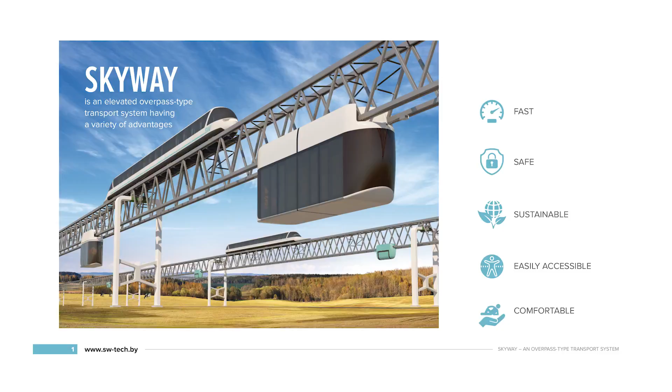Now I want to show you a small video, so you will see everything with your own eyes. I want to attract your attention to the fact that everything which will be shown is not computer graphics, but it's a real video which is operating in our Ecotechnopark in Belarus.

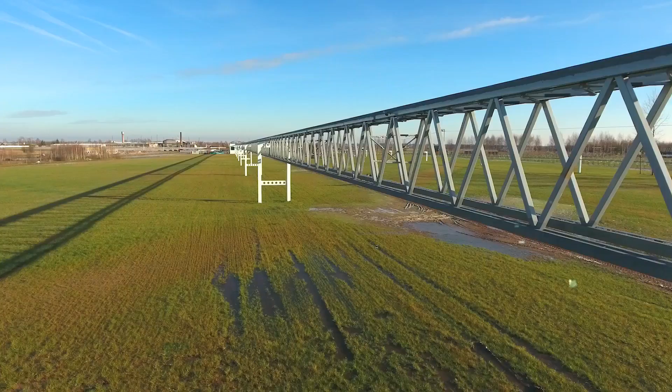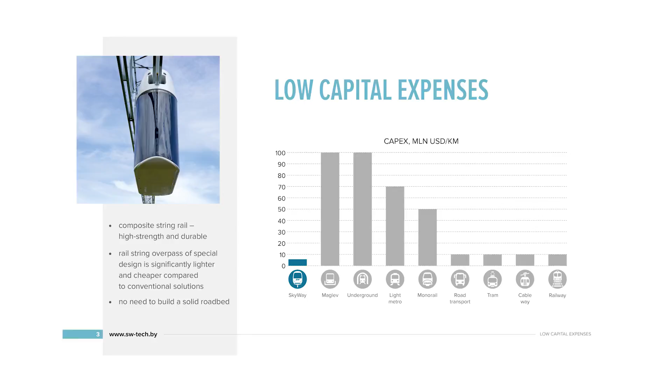Now I want to speak a bit more about the advantages of our transport system as it differs from conventional transport. First of all, we have quite low capex. You may see at this graph that our capex is at least twice less compared with most conventional transport, and if we compare with monorail, metro, and maglev, it could be 10 times less.

The main idea is that we use a very light but very rigid string rail, which is based on pre-stressed strings put into concrete. That's why we get a light but very solid structure. It consumes less material, that's why it's cheaper.

Further on, we have minimal operating expenses. If we compare with conventional transport, we can see that the most part of OPEX is labor expenses and cost of fuel. In our case, it's the least part. Our transport is driverless, so we use an automatic control system - I will speak about that a bit later. In general, our transport system is 2 to 5 times cheaper in terms of OpEx compared with conventional transport.

The next point is our transport system is ecologically sustainable. We use minimal land resources, and we use electricity, which minimizes harmful emissions to the atmosphere, and lots of people like that.

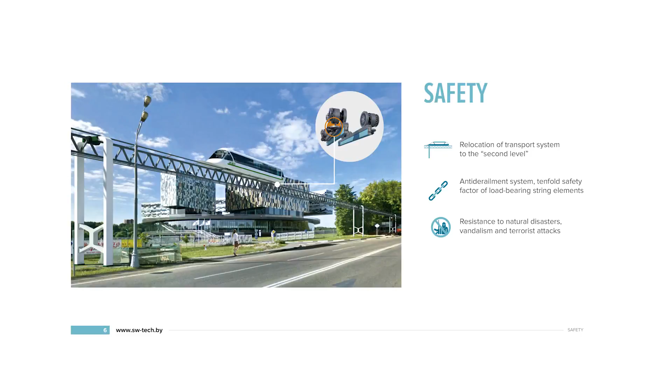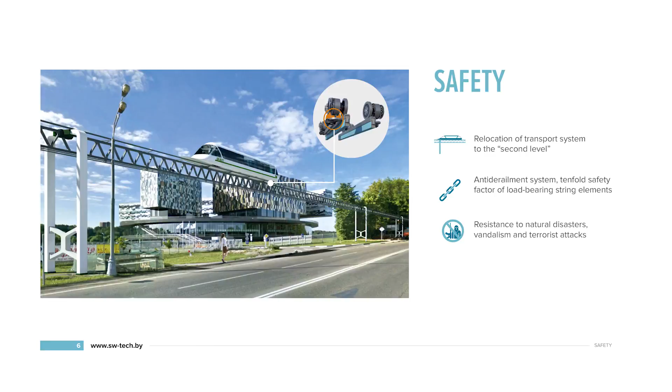The last point is safety. The main issue is that our transport system is situated at the second level, so it doesn't cross with existing transport at all, so traffic accidents are minimal. The second point is the anti-derailment system, which you can see in the picture - it also increases the safety of our transport system. And it's resistant to natural disasters. The previous speaker was talking about floods here - actually it's also resistant towards earthquakes, tsunamis, and other natural disasters, so this transport system won't be ruined if any natural disasters happen.

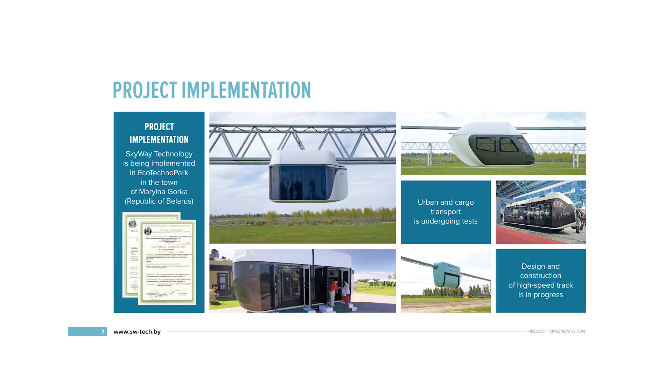Actually, now we are implementing that at our test site in Belarus. We call it Ecotechnopark, situated in the town of Maryina Gorka, not far from the capital city of Minsk. Here you can see all the main types of our transport: Unibus, Unibike, Unicar - I'll speak about them a bit later.

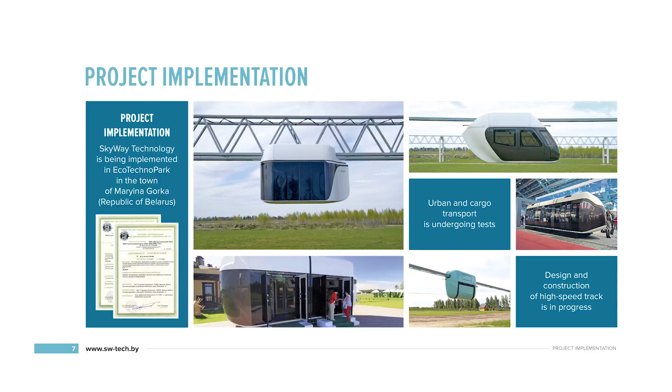At the end of the previous year, 2017, we got certificates from the Russian Institute of Urban Transport, so these vehicles are not just operating, but they are certified.

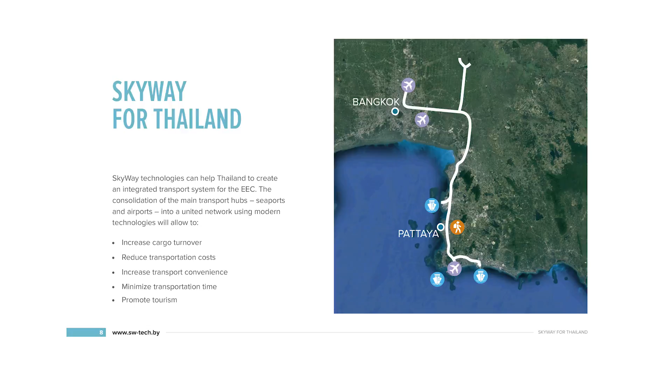Now let's think about how our technology can help the development of Thailand, in particular for the Eastern Economic Corridor. You can see this map - the main point here is to connect the seaports and airports into one integrated transport system. What we can do here: first of all, increase cargo turnover, reduce transportation costs, increase the convenience of the transport, minimize transportation time because the speed of our transportation is up to 500 kilometers per hour, and promote tourism as well.

Now let's speak about our main solutions which could be applied here. First of all, it's cargo transportation. Speaking about the SkyWay transport system, it has several advantages: it's autonomous, it's point-to-point, it's high speed, it's ultra-safe, and energy efficient.

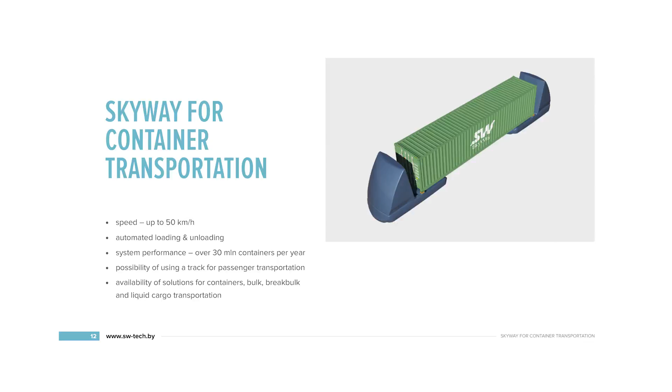Here you can see how our container transportation could work. The speed is up to about 50 kilometers per hour. It's automated loading and unloading, and its performance could be over 30 million containers per year. We can also use the track for passenger transportation, and we have different solutions not only for containers but also for bulk, break bulk, and liquid cargo.

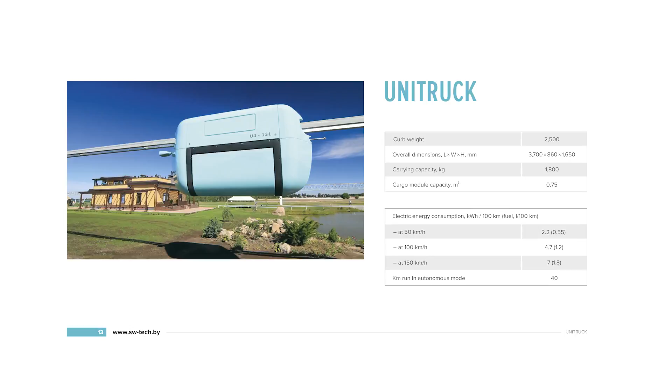This is our cargo module, which is called Unitruck. It's arranged for a small amount of cargo, for bulk cargo, actually 1.8 metric tons. But if we place them one by one, it can carry quite a great amount of cargo — we consider the performance of such a system about 100 million tons per year, even despite it looking so small. It's already operating at our EcoTechnoPark, so you may see it in the video.

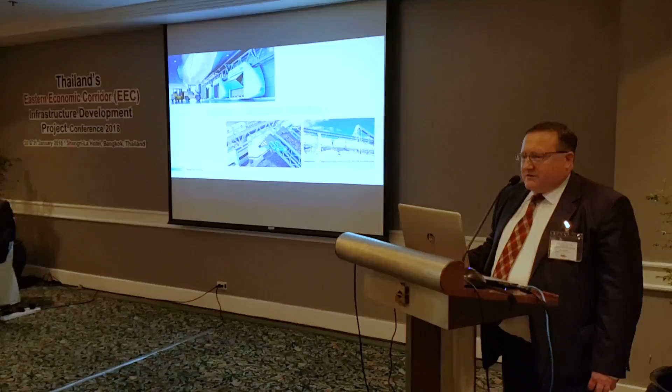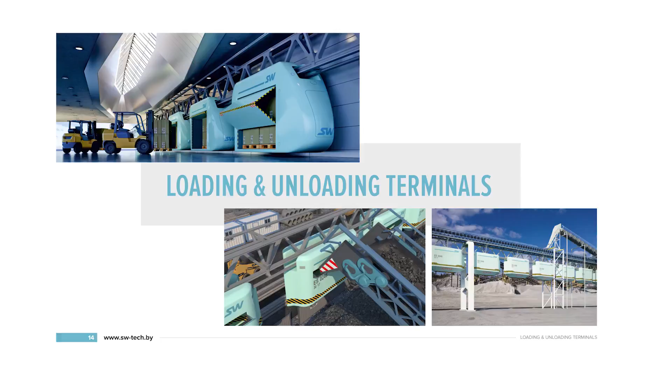We also have solutions for loading and unloading terminals, and I think that all these cargo systems could be integrated, combining airports and seaports into a unified transport system.

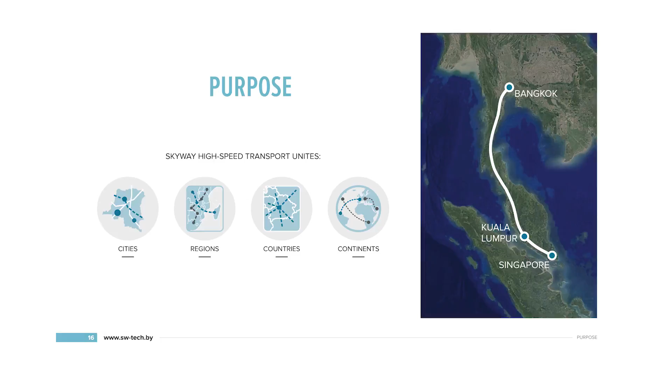Well, the next solution which I want to speak about is high-speed passenger transport. As I told already, it is up to 500 kilometers per hour. It's bigger compared with conventional high-speed trains, and it can be used to unite cities, regions, countries, and even continents.

Here on the map I give a possible example of how it could be applied for the case of Bangkok. For example, we can connect Bangkok with Kuala Lumpur and Singapore, and yesterday we were discussing the project Kuala Lumpur-Singapore. I think this solution could be also applied for this project.

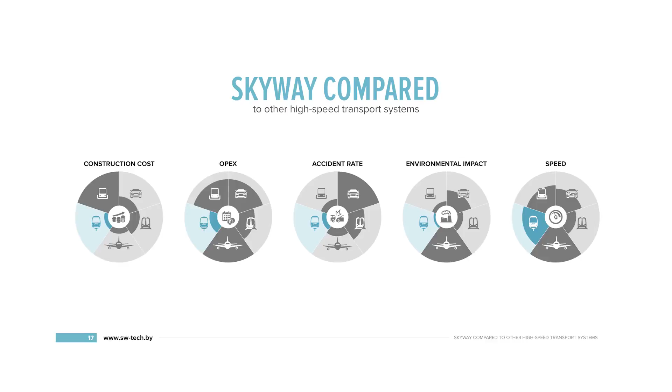If we compare SkyWay with other types of high-speed transport systems, you can see that in almost all the parameters — construction cost, OPEX, accident rate, and environmental impact — we are better. Maybe the only point where we look a bit worse compared with aviation is speed, but we should take into account one point: if you go to the airport, you anyway need to wait for boarding, stand in queues, pass control, and actually you have to add 3-4 hours to the time of your trip.

In our case, we get from the city center or city suburb exactly to the city center or city suburb, and actually, for example, if you go for 500 kilometers or 1000 kilometers, you will get to the place of destination faster.

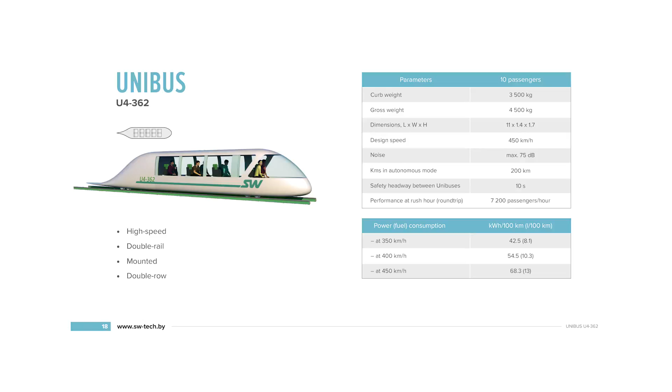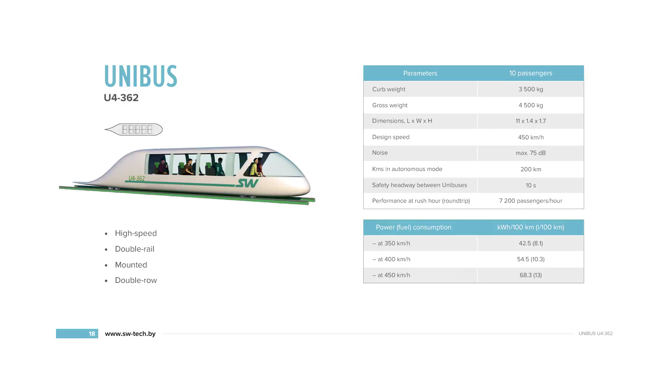And these are the technical parameters for our high-speed unibus. It's designed for 10 people. Its design speed is 450 kilometers per hour, and its performance is about 7,200 passengers per hour.

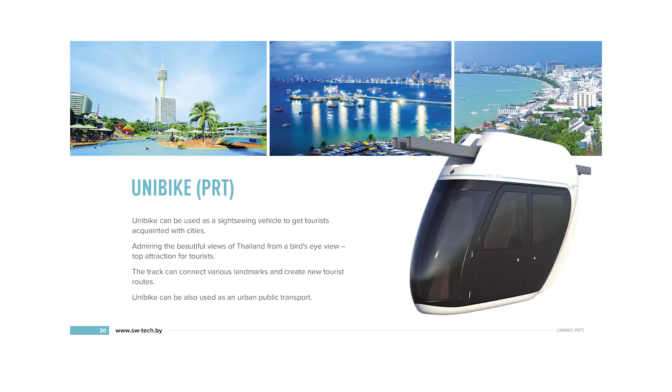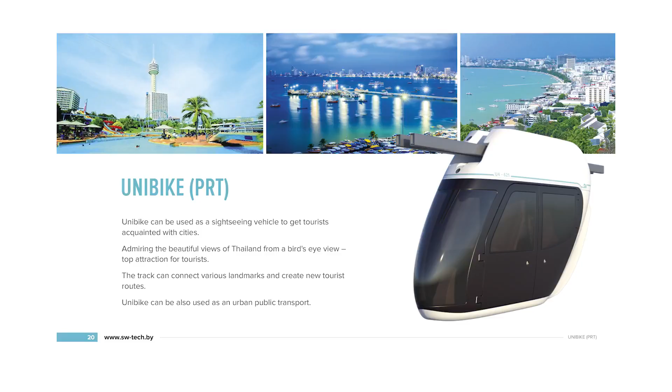The last point which I want to speak about as the last solution is urban passenger transport. First of all, I want to speak about Unibike, which is some kind of PRT designed by our company. It's designed for 2 persons, but there could be solutions from 1 to 5 persons. It can be used as a sightseeing vehicle — for example, I think it would be really great to go by Unibike on safari, or to see some natural places from a bird's eye view.

Also, it can be used as a standard urban public transport. The idea here is that we just put them one by one, so they can carry quite a lot of passengers. I'll show it later.

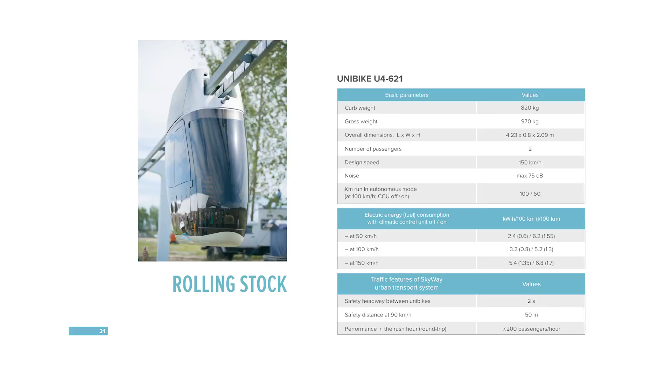These are the main technical parameters of Unibike. Its weight is just about 800 kilograms. It can carry 2 persons, and please pay attention to the energy consumption — even at a speed of 150 kilometers per hour, it consumes just 1.7 liters of fuel equivalent. It's electricity, but the fuel equivalent is just 1.7 liters, much less compared with a standard automobile.

And this is its carrying capacity. I want to show that it's not just a recreational type of transport, but it could also be a transportation system — this type of transport could carry about 150,000 people per day.

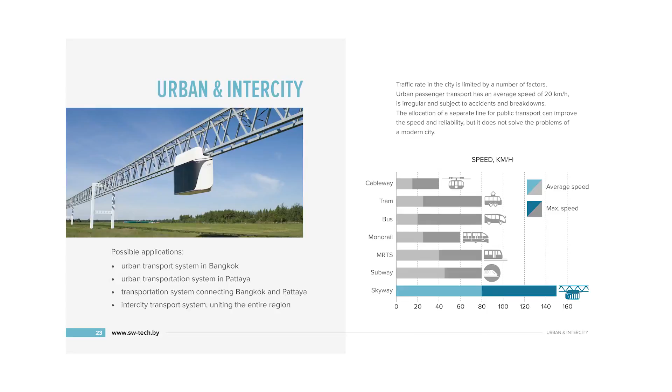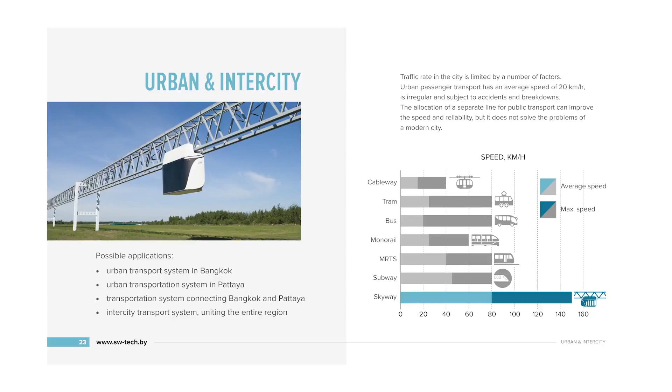I also want to speak about the other solution, which is Unibus, a full-fledged solution for urban and intercity transportation. This is a possible replacement of metro, buses, and any other types of transport. If you look at the graph, you can see the difference - the speed of our transport is much higher. It could move at a speed of about 150 kilometers per hour, and the average speed is about 80 kilometers.

Maybe you've already tried how it is in Bangkok. Actually, there are lots of congestions all over the roads, and it's quite difficult to get where you want in time. By using Unibus, it won't be a problem.

You will get wherever you need quite quick. And actually, as we see, it could be used for the urban transport system in Bangkok and in the city of Pattaya, for the transportation system connecting Bangkok and Pattaya, because now, as far as I understood, it takes from 2 to 3 hours to get there. By using this transport, you can get there in 1 hour. It would be much more convenient, and it could, of course, boost the tourism here.

And we can use it not only for these routes, but also for a general intercity transport system connecting the entire region. So if we do that, everything would be operating - it would be a general system which unites all the points.

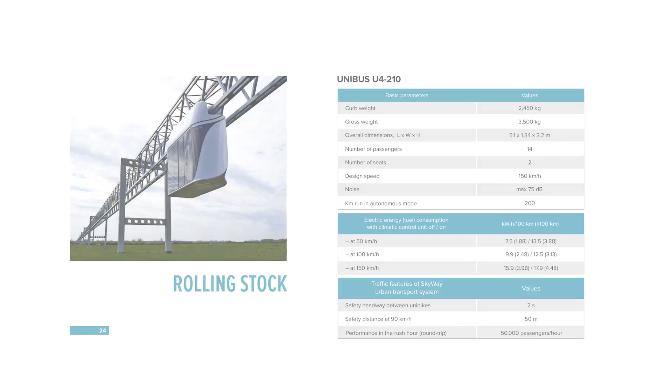These are the main technical characteristics of Unibus. As I told already, it's designed for 14 persons. And one more interesting fact, which is energy consumption: if it moves at a speed of 100 kilometers per hour, and for example if it uses air conditioner, then the energy consumption for 14 persons will be just equivalent of 3 liters of fuel. So even for 14 persons, it's much less compared with a traditional car.

And I forgot to say that its performance could be up to about 50,000 passengers per hour. So it's comparable with metro.

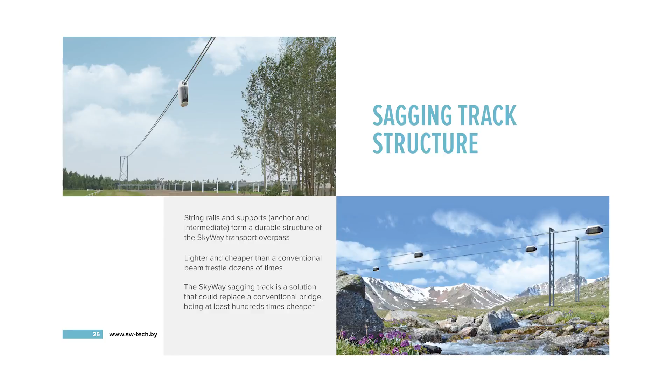One more solution, which could be interesting both inside the cities and outside the cities, is a sagging track structure. Actually, it's a solution which replaces a conventional bridge, but it's much lighter and much cheaper. So you don't need to spend billions of dollars to build bridges - this solution could be used instead. And actually, it's already realized in our Ecotechno Park in Belarus, and anybody can see how it works.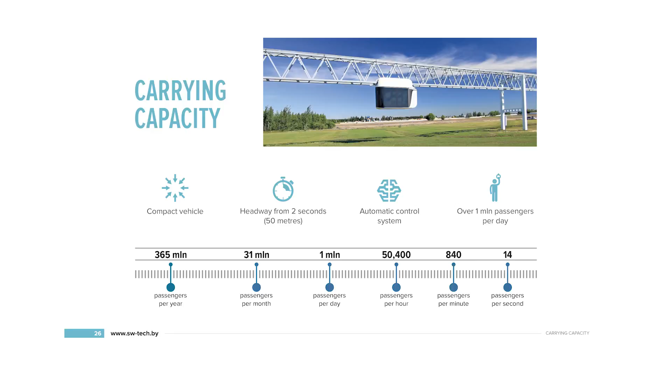This slide is devoted to carrying capacity. As I told already, it could carry about 50,000 passengers per hour and up to 1 million passengers per day.

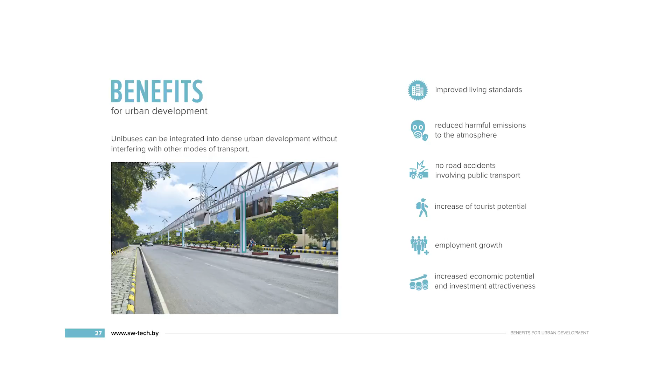If speaking about the benefits for urban development, you can see that Unibuses can be integrated into any urban infrastructure. And it can have the following effects: first of all, improved living standards, reduced harmful emissions to the atmosphere, practically no road accidents, increasing of tourist potential, jobs creation, and increased economic potential and investment attractiveness.

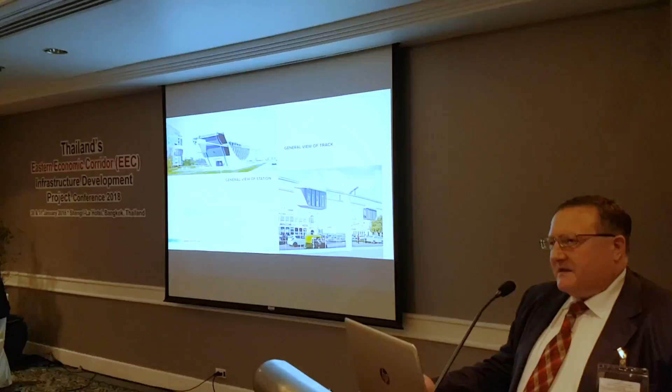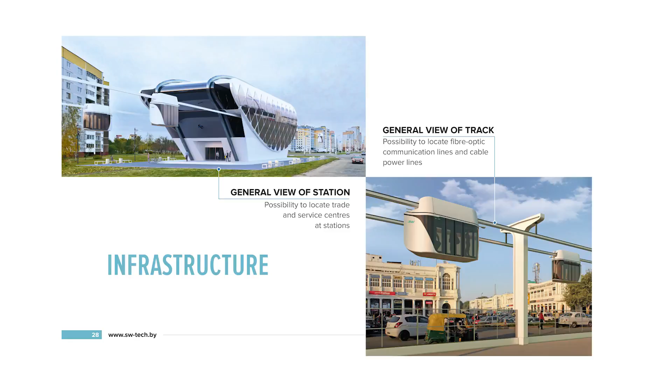This slide is devoted to our approach towards infrastructure, and actually some trade and service centers could be placed inside the stations. We also can use our track structure as a place to locate fiber optics and cable power lines. I'll show it in the next slide.

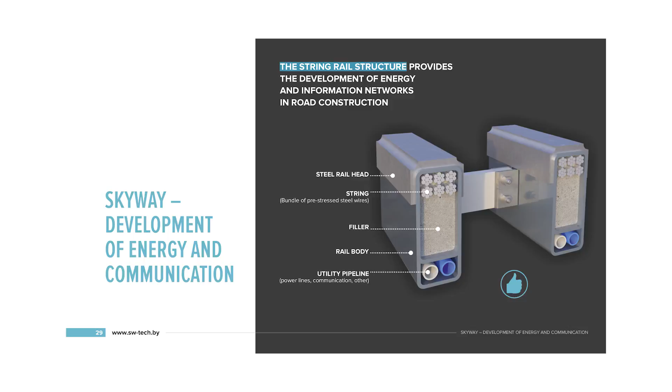So, for example, if we are speaking about some hard-to-reach areas, which I think do exist here in Thailand, you can use this transportation system not just as transport, but also as a means to provide it with internet and electricity.

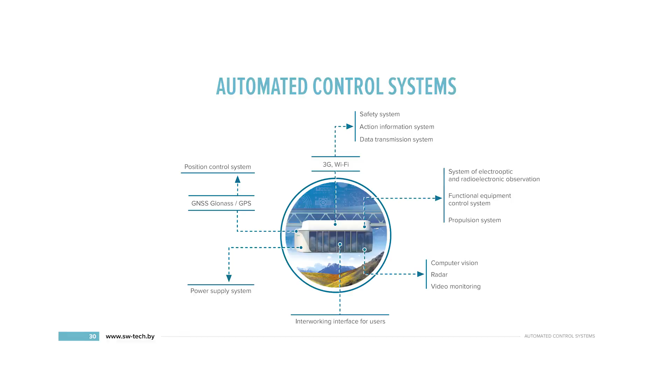I already told that our transport system is driverless. It's operated by an automated control system, the main features of which you can see on this slide. It uses Wi-Fi and other points, and actually it involves both the vehicles and the stations.

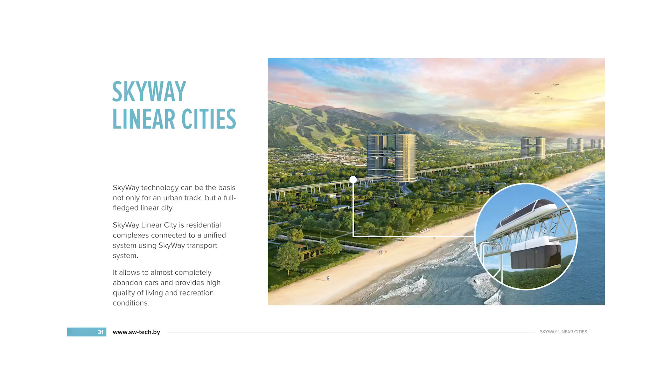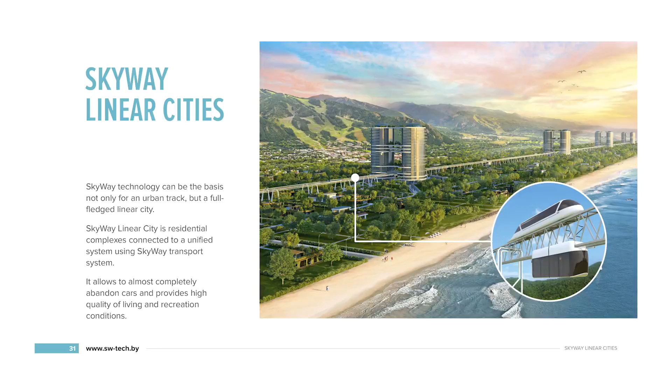One more solution which could be applicable here in Thailand: these are SkyWay linear cities. You can see in this picture that such cities could be created along the seashore, maybe in mountains, at any place which is convenient for life. And actually you can live in a rural area, but you don't need any car to go to a place of work or place of study or to some recreation, because it is connected by horizontal lifts.

And you may use, as you can see in the picture, either high-speed trains, which can deliver you, for example, to Ho Chi Minh, to Hanoi, to Kuala Lumpur, to Singapore, or if you need to go short distances, you can use the urban transport. And actually, everything is situated within walking distance, so you don't need to use a car at all.

And I can surely say that this would allow people to live in a healthy area and to enjoy life much more.

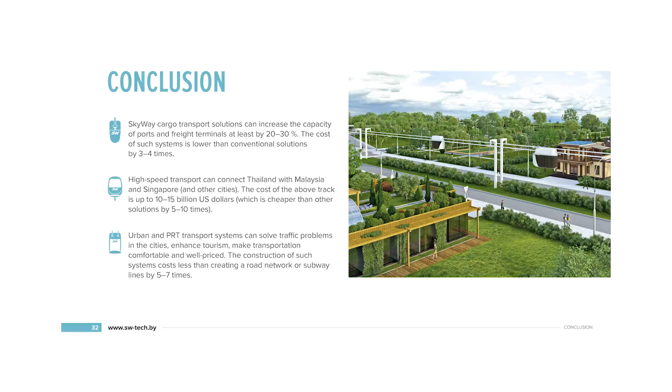Well, and now I want to make a conclusion. First of all, our cargo solutions can increase the capacity of ports and freight terminals at least by 20 to 30%. And the cost of such systems is 3 to 4 times less compared to conventional ones.

If speaking about high-speed transport, we can connect Thailand with Malaysia and Singapore and other cities as well. And the cost of such a track, in my opinion, could be up to 10 to 15 billion US dollars, which is cheaper than other traditional solutions, especially the Japanese one, by 5 to 10 times.

And the last point: the urban PRT transport can solve traffic problems in the cities, enhance tourism, and make transportation comfortable and well priced. And the construction of such systems costs less than traditional ones by 5 to 7 times.